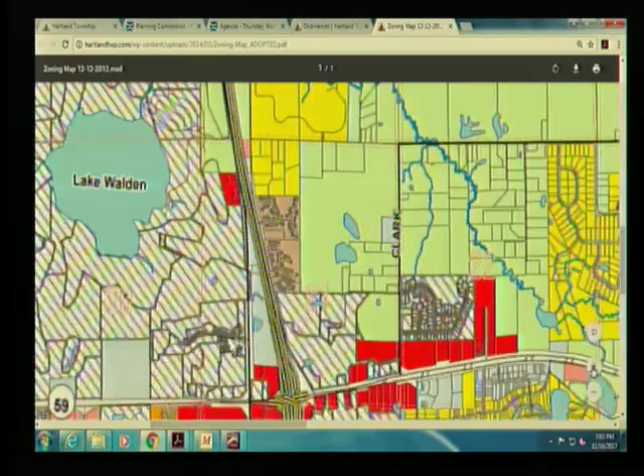The zoning on this property - this is a zoning map of the township. Again for reference, here's M59, and this is the property. You'll notice the front portion is red and the back majority is green. So there's a split zoning on this property, and I'll try to zoom in to show you.

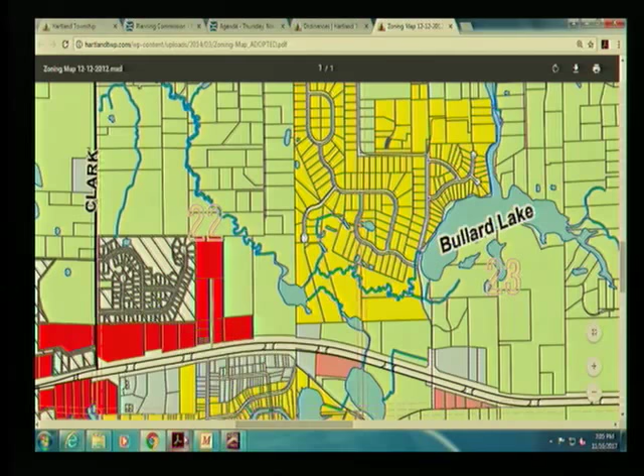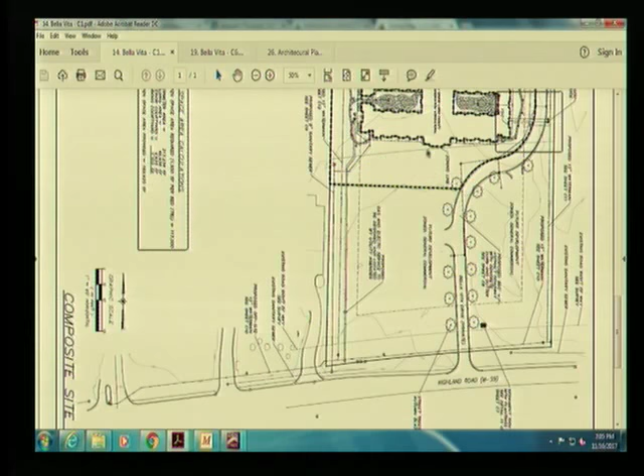So they've moved the building back into this portion of the site. I've got a site plan, if I can pull it up. It's tilted a little bit, so you have M59 over here - maybe I can rotate that. So M59 at the bottom of the screen, you have a drive that comes in, and then you've got that approximate zoning boundary, and here's their facility.

It's a 41,000 square foot facility, and it's a home for the aged facility. I'm not going to get into describing exactly what goes on there, but it's consistent with or comparable to our nursing home provisions, and the ordinance has specific special use permit standards outlined, which have been included in the staff report for that.

So the parking is in the back. The building is in this configuration with two courts, and the front portion remains undeveloped. Of course, keep in mind this would be zoned commercial in this portion of the site. Again, this facility is only permitted by special use permit in that residential district. So with that, I'll leave it open for any questions or comments you've got on the SUP.

Chuck Sakrinas, representing HSLG. Address is 10751 South Saginaw, Grand Blanc, Michigan. Troy did a pretty good job of explaining what we're after here. I know the first part is a special land use. We are seeking to put our building in the CA zoning behind, not up in the commercial, so it does coordinate with what your ordinance states.

HFA, or Home for the Aged, is a little less than a nursing home. Nursing home is more public or public-funded. Home for the Aged is private pay. We are just a step above what's more comparable to an assisted living. So assisted living, AFC large group, is up to 20 beds. Anything over 21 is considered Home for the Aged. We would be a state licensed facility.

We feel there's a need. We've done market studies, and there is very good need for this product here. We are trying to stay consistent with the residential look, not a commercial look of an institution.

We do have enough property by going here. Originally, we were going to join up with Bob Schroeder at Mayberry Homes for the Newberry project, and we decided, because it's taken so long down there, that we went ahead and built a project in Grand Blanc. Now we're going to come back to Hartland and do this one next instead of flip-flopping them. But it is zoned for us to allow that under a special land use.

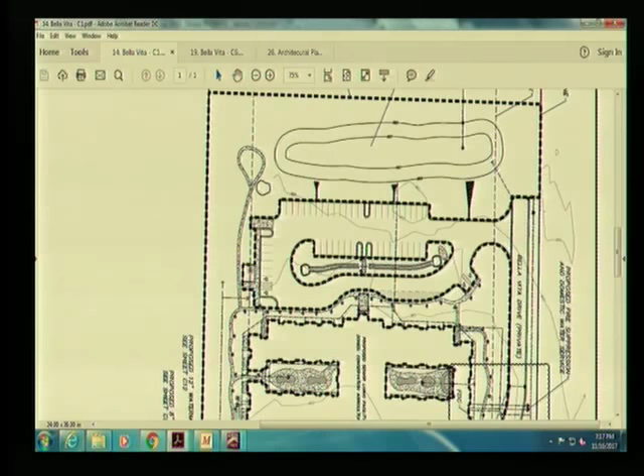This is the proposed building, again, M59 at the bottom. In addition to this building, the applicant is proposing a detached garage in this vicinity, and I'm not sure how well it shows up. I'll try to zoom in here. This dotted or dashed line would represent that 75-foot setback, and it almost bisects this proposed garage. You can see the proposed care facility does comply with the setback, but this garage right here would be located at about 63 feet from the west property line.

What is there to the west again? Well, that is an undeveloped parcel. There's an office here, and then this is the ice rink gymnastics place.

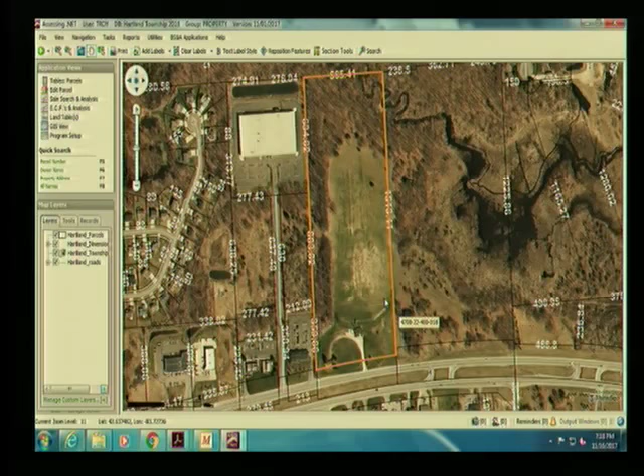Is it, can you move it? We can move it back by the dumpster. So they'll move it to comply to the 75 feet.

Okay, so item 3, the last one, is an open space requirement of 1,500 square feet of outdoor open space for every bed in the facility. Based on the number of beds being about 78, they're required to have about 117,000 square feet of open space. They have approximately 182,000 square feet, so they meet that open space requirement.

Okay, everybody good with that? So that would wrap up the criteria that we would use for the special use. So what we would typically do is decide whether we're comfortable with a special use on this parcel, and then we get into our site plan review.

Okay, so if you're so inclined, there is a motion on packet page number 26 that would contain the motion that you would need for this.

I move to recommend the Township Board approve site plan with special land use application number 17-016 for the construction of a nursing home, approximately 41,500 square feet in size, to be located north of Highland Road, east of Arena Drive, currently addressed as 11579 Highland Road, based on the following findings.

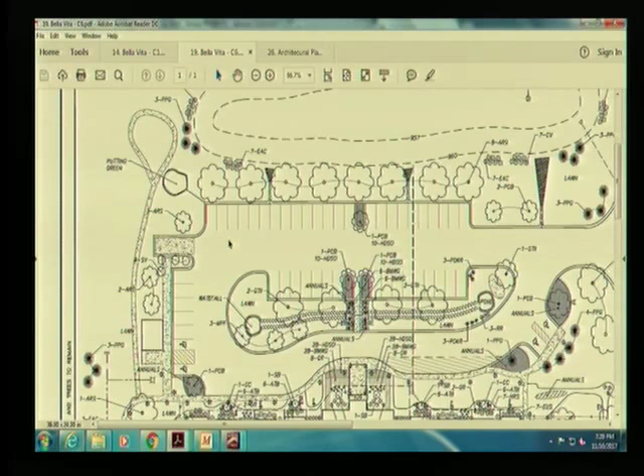So the brick is matching the brick on the building? Correct, same brick. I'm going to turn it over to Sue at the moment.

Right, and just as a general comment, we're looking at our ordinance requirements right now, and we're finding that you've got it adequately screened really well. You've added some landscaping on the south side, and we feel that's sufficient.

Would everybody agree? With moving the garage back there, I'm sure there's going to be some landscaping put around the garage. Something will happen there, but for the most part, is everybody comfortable with that? We'll see what their new design looks like with the building moved and the dumpster enclosure, and how the landscaping changes.

Comments on that? Anything? Okay, so now I'm moving up to the top of page 19. We're on off-street parking. By calculation, they're required to have 41 spaces. They're providing 49, so they're meeting the requirements.

The barrier-free spaces, they're supposed to have at least one space van accessible, one for every 25 parking spaces. They're providing 4, so they're in excess of the requirement, which probably in this facility is a good idea.

Parking lot, driveway, internal road setbacks. We need to have a discussion. Troy, could you bring us up on the screen with the east side property line and the internal road?

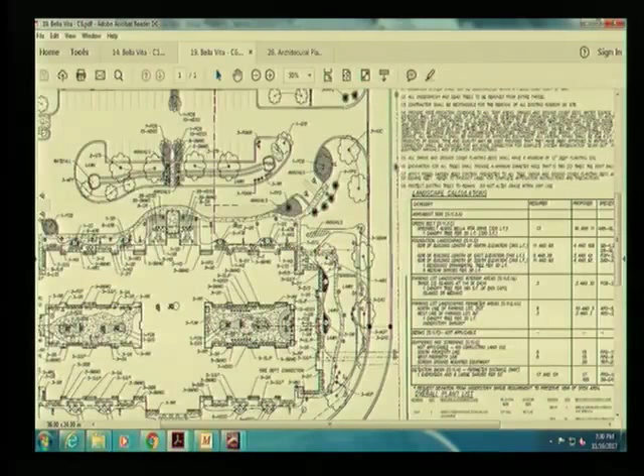I'll just stick with the landscape plan. So the drive that comes in from M59 comes in almost in the center. It's using the existing curb cut that's there, so it's somewhat centrally located in the site. Then it comes in, it meanders to the east, and as it comes up in here, it's only 18 feet from this east property line. It's required to be 20 feet. So this drive through this area here is the portion that does not comply.

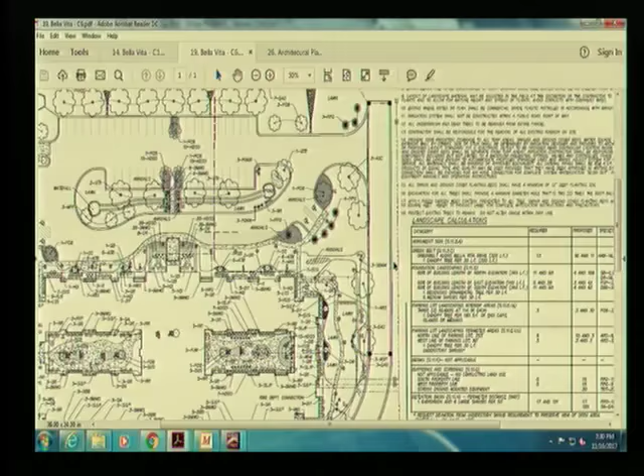Comments? Can you move it over 2 more feet to comply? It looks pretty tight, I'm not sure you have a lot of room, but I might be willing to compromise if you were willing to add a curb cut and have access capability for a future lot to the east.

So a cross-access easement is basically what I'm asking for. Not knowing what would go to the east, and right now we have to deal with MDOT on our traffic count coming out on our site, I don't want to open up a can of worms.

If I may, I have my civil engineer. Sure, absolutely, ask.

I would be concerned with allowing access. Maybe in the future, but as far as currently with MDOT, if you don't have a need for it now, I would be concerned about offering that. This is a private road. That parcel has access to M59, so I would be more inclined to move the road 2 feet than go down the other path.

Okay, that's fine. Can you go ahead and move that 2 feet for us then? Okay, yes, all righty.

Loading spaces, there is one on the plan. Troy, your comment on whether additional would be required. Are you saying that our ordinance would require that? Is that why you're...

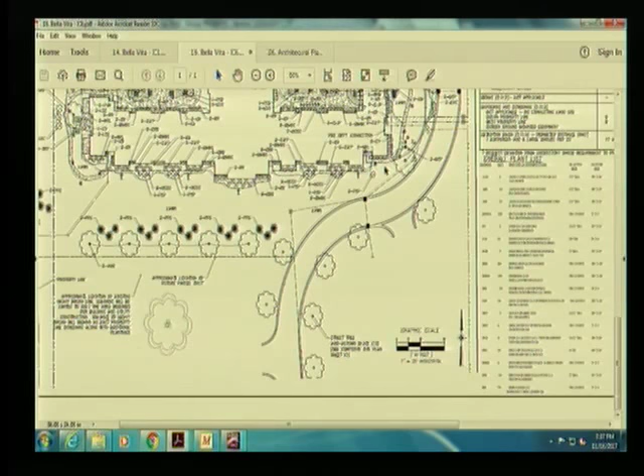On the greenbelt, this drive that goes through here is not truly a private road. They didn't go through the process of getting a private road approved in front of the Planning Commission and the Township Board. It acts like a private road, but it's more of an internal service drive for this development. So what we've tried to do is get canopy trees along it in a similar fashion as you would on a private road, but keep in mind, technically, it's not a private road.

One of the areas we ran into some problems is on this east side. You can't really see it on the landscape plan, but there's a water main that will come up through here, and even if they move it over 2 feet, it's going to be really tight to install trees on this side, just so you know. That's why we wanted to identify that we're somewhat applying these standards, treating it like a private road, but keep in mind it's not technically a true private road. Just wanted to point that out.

Okay, any comments from the commission on that component? I want to go back to the greenbelt we're kind of talking about. Can we talk about that? My understanding with the greenbelt is we need one along M59 because that's the public road, and I know you've got a bunch of landscaping in between. But I think along M59, like we do with the Meyer development and all that, we just develop that greenbelt as the property's being developed. I don't see any of that here, and I just want to clarify if that was the intent.

That's my understanding. Well, what they've done in this case is put this area right here in front of their building, and I think that's a good discussion for the Planning Commission to have. I don't know that the ordinance specifically addresses a situation like this, where you've got a building further back and land to be developed. Commissioner Grissom did point out some other sites where landscaping was required, but those were PDs, and I wasn't involved with the PD and the discussion on how that went.

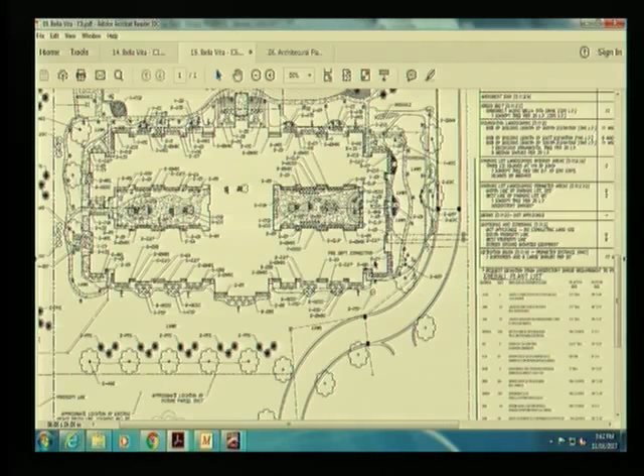Troy, you want to give us some information on that real quick? So this is the building, and there are proposed mulch beds and landscaping around the building. There are some things that are going to have to be updated - their plant list, there's some things we've identified and talked with them that need to be changed. Some of the species listed are the same species, but they're listed as different sizes, and some items identified here aren't necessarily listed on the plant list as well. But effectively, there's a calculation on the building perimeter and how much landscaping is needed.

One of the things we're attempting to do as we update the ordinance on landscaping is to minimize the landscape mulch bed area if possible. So I wanted to point out what we've got here, and if you think there's too much mulch bed around here or not enough, leave it for discussion for the Planning Commission. Okay, any comments?

So you have more than ample foundation planting all around the whole building. We see that. I think one of the comments brought by the planning department was just the quantity of small ornamental trees, or trees, that they found a bit deficient. It's a large, low scale, low height residential building, but it does need some more trees.

So maybe there's a way it can be looked at to reduce beds, because we only need 60%, but to incorporate something larger than just so many shrubs around the whole foundation. So maybe when you guys look at that, look at it holistically, to get some trees so things are a little more in scale, but we're not asking for more. It'll be a trade-off. Okay? We'll work with the Planning Commission.

Work that through, because I think you'll be happier with that than this line of low shrubs around this long building. Does that make sense? It does. Less shrubs, more small trees, just to get things in scale a little more. I'm not asking for more, because you have more than enough foundation planting.

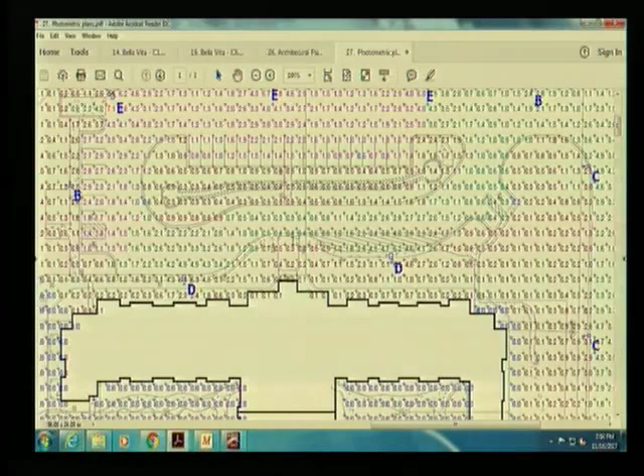You're thinking ratios from one to the other are your concerns? It's just an average I think it might be. So what we typically do is if we can get an average from the company that does a photometric, we'll take that. Otherwise we're looking at these numbers within so many feet of that fixture and kind of adding them up ourselves. I'm guessing it's right in this area here that we were over the 0.5.

D could be dropped down to a C, which is a little less light. The D to the right has the same issue. It looks like it's all around the parking lot lights, and I know what they've done is just dialed them down a little bit. All our commercial buildings, all our parking lots, are within compliance, so I'm guessing it's just a selection of the fixtures, from D's to C's to comply, and that'll fall right in line. Not a problem - haven't found anybody that can't comply with it, and haven't heard any complaints that it's too dark.

Fixture height, probably just something you need to fix - 25 feet, not 27. Is there a reason why they're 27, do we know? I think they're going to be 25. Okay, all righty. We've got some that are even 16. I don't know if you've ever used the shorter ones, but you probably need a few more of them also to get the light coverage going. If you go too low it's hard to get it. Okay, so you comply with the 25. Comply with the 25. All right, get that taken care of.

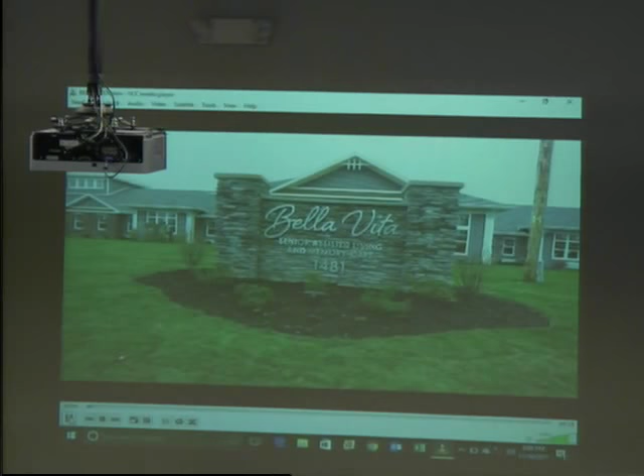So what is your sample, Hardie board or? Hardie, yeah, that looks like Hardie board. We did change, and the Hartland project will have more stone around the front elevation of the building instead of siding, and along the other side we did go from siding product to stone product. This building here in Grand Blanc is the same way. It faces Hill Road, and the parking lot's in the back.

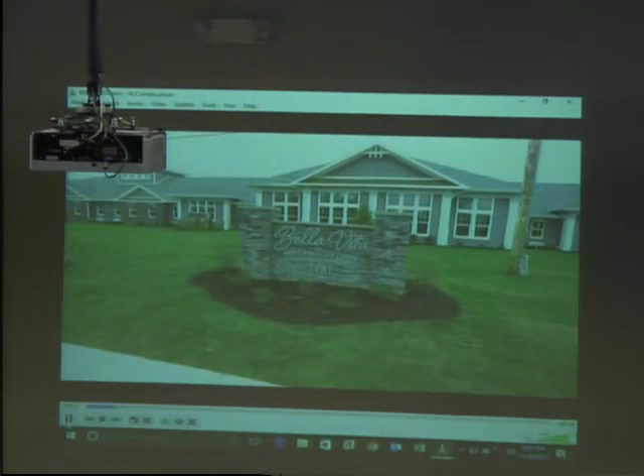I'll see if I can move along a little bit. So there's just some, look at the products. Those landscape beds are too big, so I said there's plenty and it's little, not in scale. And if I go too fast, just let me know and I'll be glad to slow it down or stop.

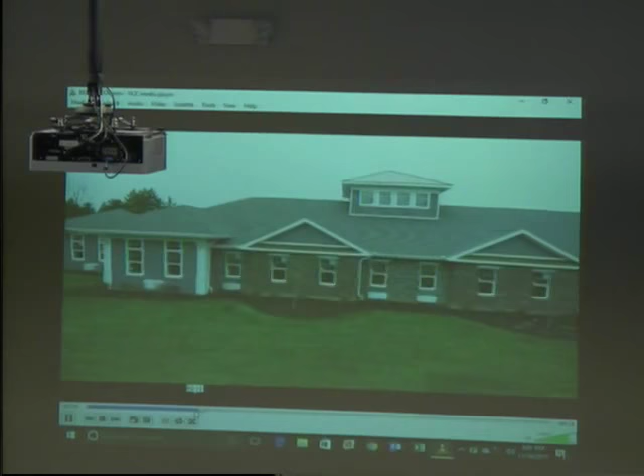We do white trim around the windows. If it's brick or stone, it gets limestone sills and headers. The rooms all have PTAC units underneath of them for the heating source, as you would in a hotel.

You can see the different elevations, the 11-foot walls on the corners versus the 9-foot walls. So it gives it that break-up look with the hip roofs and all that.

This drive, well, let me go back just to give you an idea. In the Hartland project that we're proposing, this is the same similar drive setup. It comes along the memory side, but there's a lot more room because we have the fencing area and the courtyard and all that out there. But it's the same concept.

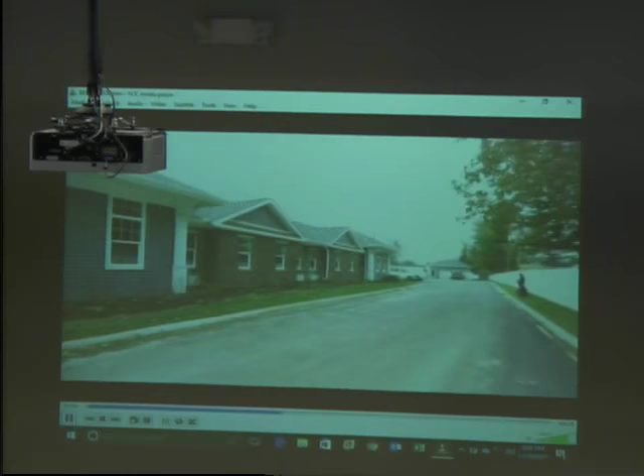And then on the north side of the building, these are 25-foot poles and they're almost flat to the ground, not on a 2-foot base. Our little 42-inch bollard lights light up the sidewalk at night.

Is the entry feature on the drawing we have, ours looks different than this one, is it? Yours shows a dotted line, but this is the steel canopy. You can see the coach lights on the columns. And then under the canopy there's LED lights that light up the bottom inside of the canopy at night, and that light then kind of disperses. So would that be the same? It'd be identical. Is it identical? Yes.

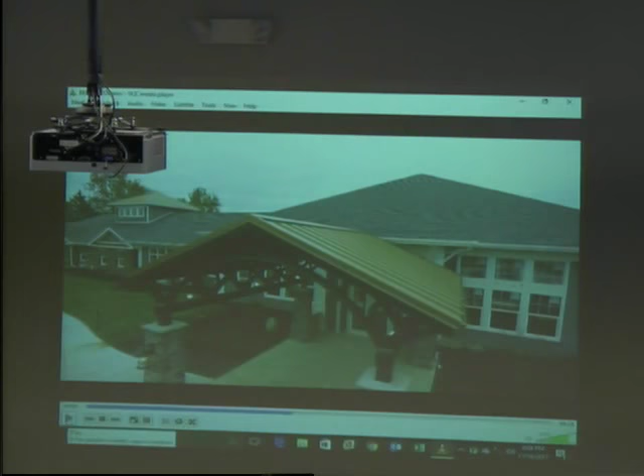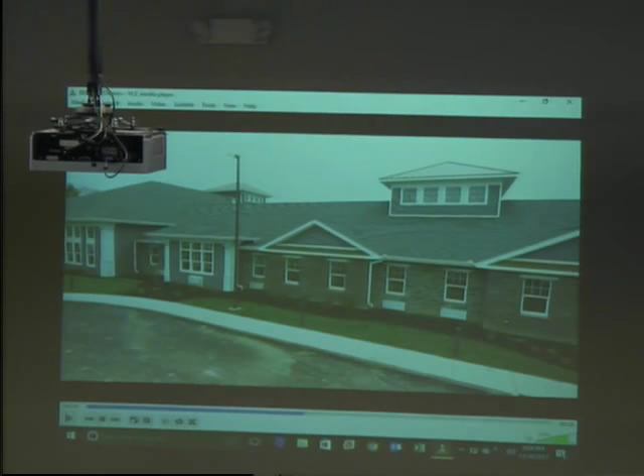All the cupolas, the big cupolas up on top, are just decorative features. The windows are frosted out, but there's a glow. So at night there's lights in there, one light in each one to give it just a faint look of a light in there. But the windows are frosted. You cannot see in. You can't see any studs or anything.

So they don't bring any kind of natural light in, obviously? No, they're just in the attic.

Then looking over, this would be the assisted living side. Same setup here, it'd be the west side of the property. The courtyard, the walk that goes in. There'll eventually be a gazebo in the middle for our residents, and then natural stone water drainage to the storm drain that's in the courtyard here.

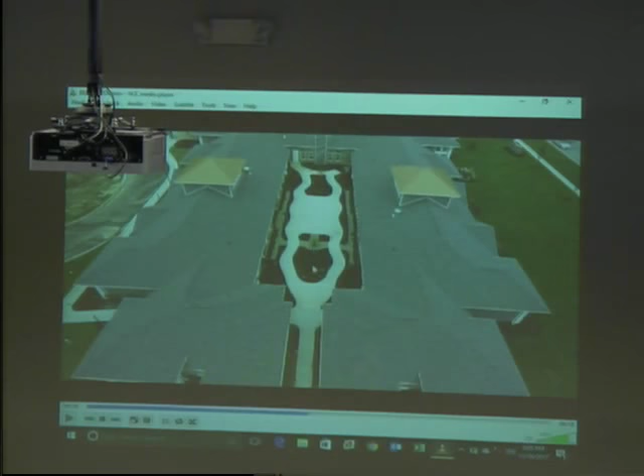We have two rooftops that heat the main structure, one's on the assisted side and the other's on the memory side. And from the ground, from the road, you cannot see any of those units. They're tucked back in there.

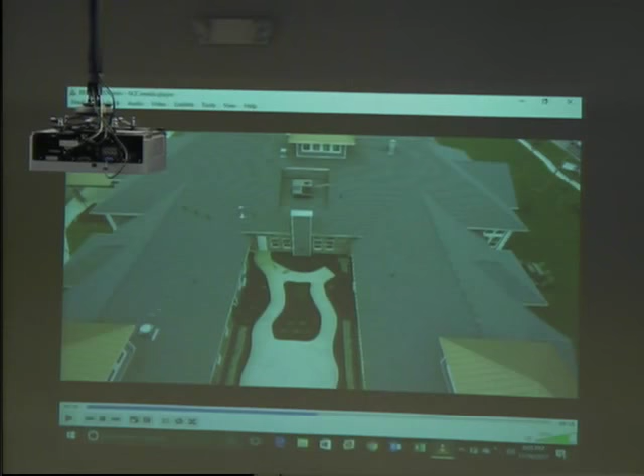And this would be the memory side, so our residents can come out here and they're not going to elope. They have to go back in the building. The building's locked down 24/7 unless the fire alarm goes off.

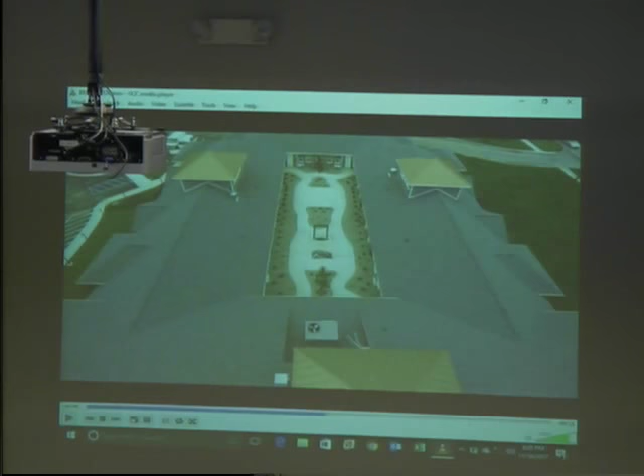And then there'll be two gazebos out here, and this here is a rain wall system where the water trickles out of this structure, just for sound. Memory patients need sound and activity, and so that's why we're trying to create these kinds of features for them.

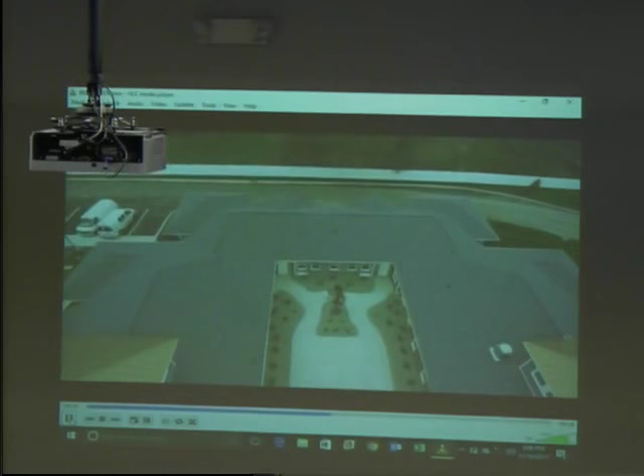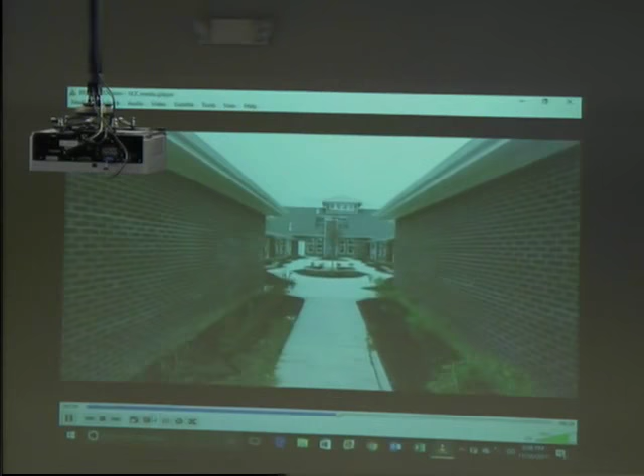So looking into the courtyard and the assisted side, same concept here.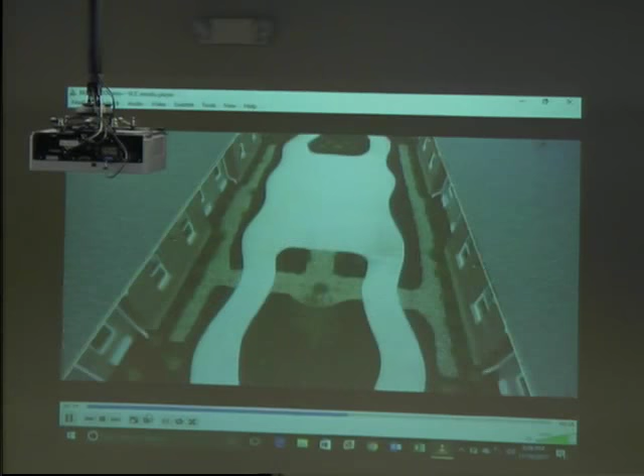We have not finished this yet, but identical to what we're proposing for Hartland, the island here is a waterfall. The water goes down through the bridge to a recirculating koi pond down here, then it gets pumped back up and it just flows continuously.

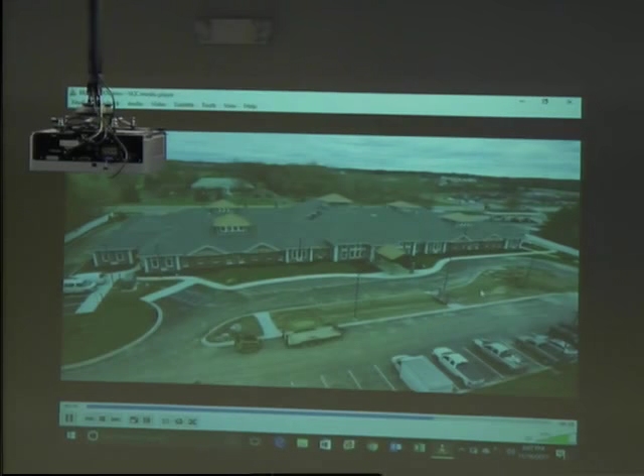Parking lot setup's pretty much the same. The only thing different in what we're proposing in Hartland is there's parking spaces right here. Where in Grand Blanc, we only needed like 32 spaces for their ordinance, and I think we've got 38. We're all about having more, because when you have parties and events, you always get that extra traffic.

That's a good depiction of the level scale of the loading zone too. It's obviously sufficient, and it gets you past the entrance, so you're out of the way of oncoming traffic.

Is that your generator there on the left? It is, and for Hartland it actually sits over here. This is the only spot we could put it in this project, so we had to put it here. I had a question because I was reading through there, and are those loud when they're running? No. No? Okay, I mean that's a big generator because you're powering that facility. Right, I was looking at the size.

Yep, and we do have, I think, adequate landscape. We have more landscaping in the Hartland project around it than we do here. We may change this, we're not sure.

So that's, in a nutshell, the building. If you have any questions, I'd be glad to answer them.

Are you proposing a fence like on this one? I don't think there's a fence on our plan. I didn't see only one fence - it's along the memory side, and that's a 6-foot black aluminum wrought iron style fence. It's not a white enclosed vinyl. Is it on the east property line? East property line, along the drive.

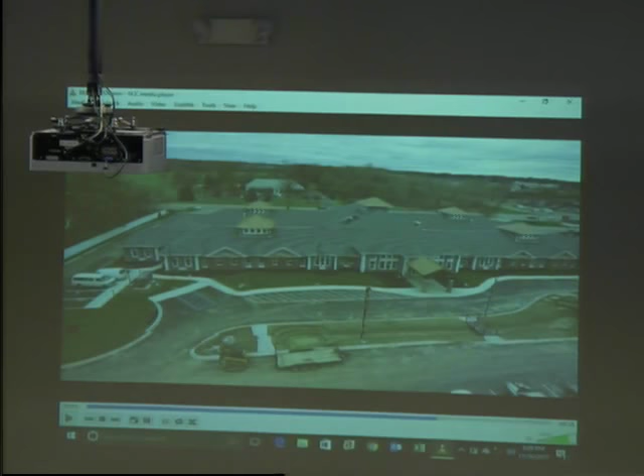We were tight to residential here on the left side, and so there was an existing hodgepodge of fence, both on the east side and the north side, and so Chuck agreed to take theirs down and put all of it around. It was more driven by that - there was vinyl, one style of wood, another style of wood, and chain link in the township, but this doesn't warrant it other than protection.

Yeah, no, I don't think we would want you to put boundary fences up. Yeah, and it was required here. Yeah, and I think your project's probably better looking for a nice continuous looking new fence.

Yes, it is. Well, let's touch on these areas here in the architecture that we've got going. I'm on packet page number 24, the first chart being materials group 1. We've got some brick minimums, we've got some stone maximums.

Looks like they're over, they're fine within the stone. They're under on the brick itself. Comment to that has been that given the building materials have changed since our architectural requirements were put in, we've been combining a lot of stone and calling it masonry products, so as long as combined we're getting in the realm of where we needed to be, we were good. Would we be comfortable with that in the pictures you're seeing? Yeah, yes.

Okay, so then I will move down to the materials group 1 for the detached garage. Looks like it's pretty much just sided. It is. So is that what your intentions are with it? Are there any thoughts on that?

Comfortable with that? Do you want some stone on it further in the back? I think it's fine. Fine with it? You all right? Okay.